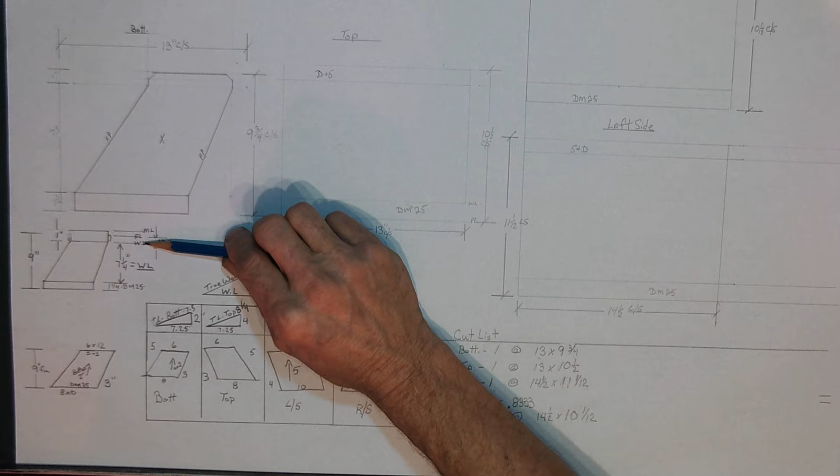Once we have done our triangulation to find the working length of each individual panel, our next step is to take the working length from each individual panel and add the allowances for our transverse connectors. As you can see from my sketch here, I need 1.25 inches for my Ductmate 25, and I need a total of 1 inch for my S and drive accommodation. That leaves me a total of 2.25 inches.

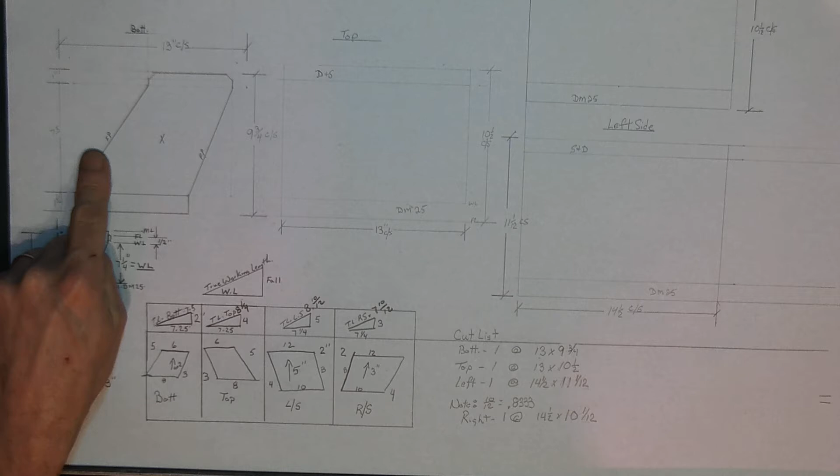So if I add 2.25 inches to my working length, or true working length of the bottom, I end up with 9.75 inches. Now if I come back to my original sketch here and add 8 and 3 is 11, plus my 1 inch female Pittsburgh, and my 1 inch female Pittsburgh gets me this 13. Now, the female Pittsburgh, I made that decision by putting the female Pittsburgh on the shortest side of my transition and the male Pittsburgh on the longest sides of my transition, which makes the left and right get the male Pittsburgh and the top and bottom get the female.

So, I end up with a dimension that is 8 and 3 is 11, plus 2 for the female Pittsburghs gives me 13. And our stretch out of 7.5 working length and 1.25 plus 1 gives me a cut size of 9.75 by 13. Now I've done that same thing for the top. I have a true working length of 8.25. Onto that I had to add 2.25 to get me to 10.5, and it is also 13 because I have 8 and 3 plus 1 plus 1.

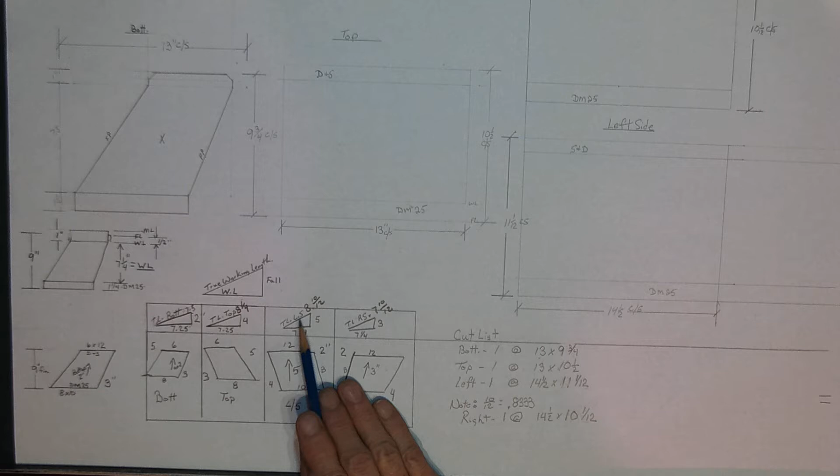Now when we look at the left and right side, we have to realize that now we are dealing with the male Pittsburgh, which is only 1/4 inch on each side, so I get 12 plus 2 plus 1/4 plus 1/4 gives me a number of 14.5. Now my true working length was 8 and 10 over 12. I converted 10 over 12 to a decimal of 0.8333, makes it easier for me to calculate, so I have 8.8333 plus my 2.25 inches for my transverse connectors gives me a left cut size of 11 and 1 over 12 by 14.5.

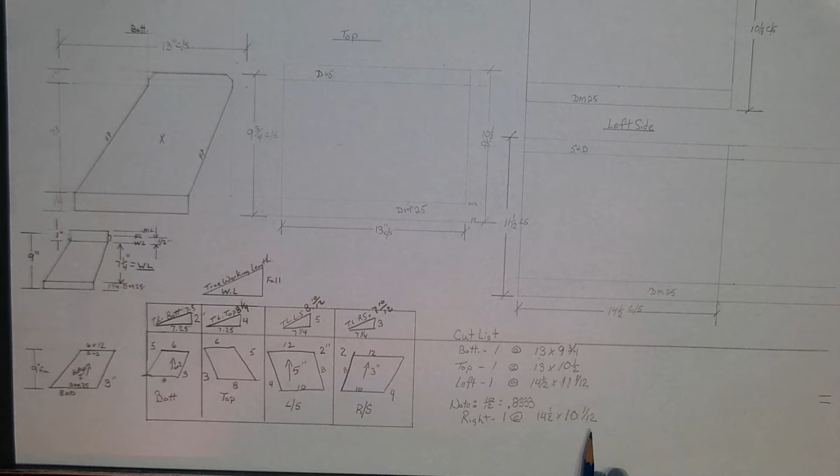Same procedure for the right side. I have a true working length of 7 and 10 over 12, which is 7.8333, plus my 2.25 gives me 10 and 1 over 12, and I have 10 and 4 plus 1/4 for the 14.5, the other dimension. So, what I have done now is quite simply, I have laid out my outside cut size of bottom, top, left, and right. This is no different than me going to the shear with this information and cutting these sizes.

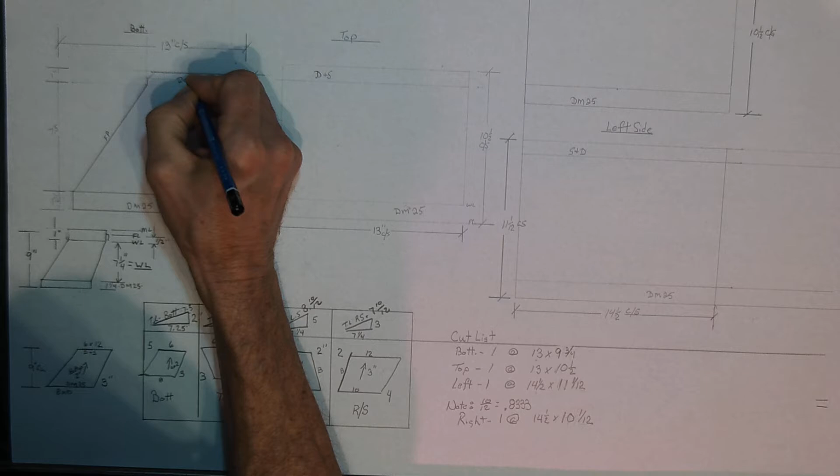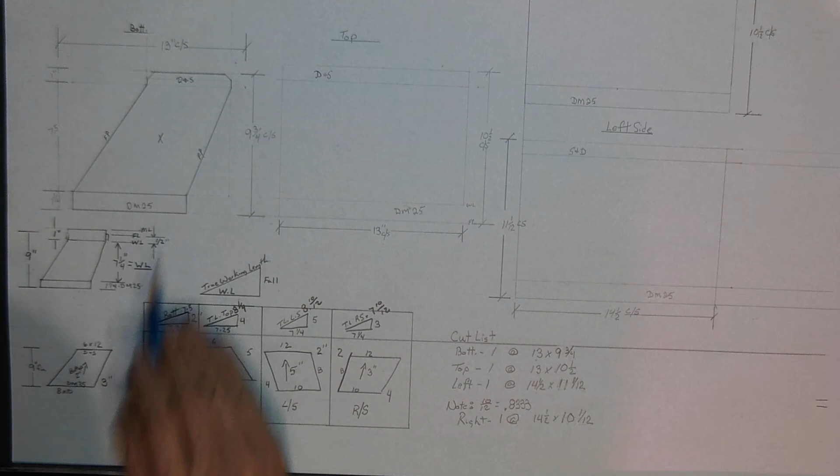So let's take a look at what I've done with the bottom. From my cut size of 13 by 9.75, I've subtracted 1.25 inches for my Ductmate 25. And I've subtracted 1 inch up here for my drive and S connection, which leaves me with my working length of 7.5 in between. Now, starting at one side from my cut size, I first take off the inch that is required for my female Pittsburgh that I allowed in. Then I'm going to put in my dimension, which is 8 inches. And I'm doing that along my working line.

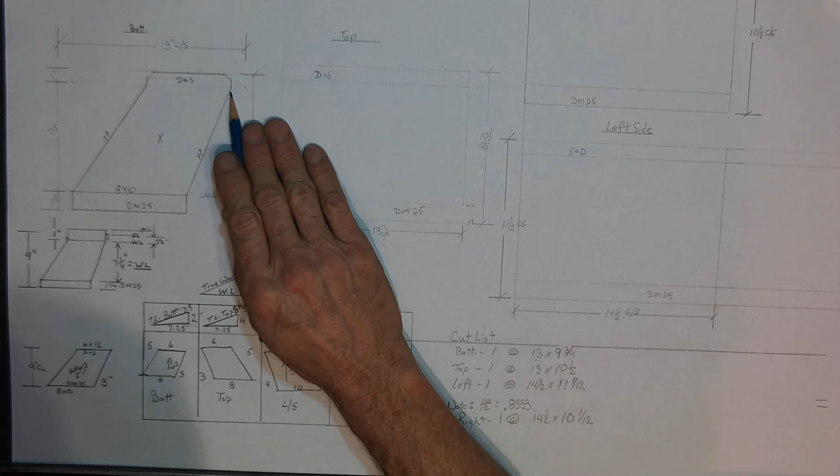I'm going to come up to my working line on the other side, and in from this corner now, I'm going to come in 1 inch from my duct size, and I'm down 1 inch because I scribed the inch to accommodate my drive and S. I come in 1 inch, I come in my duct size, which is 6 inches, and I connect the dots. I now have this panel. It's exactly where it needs to be.

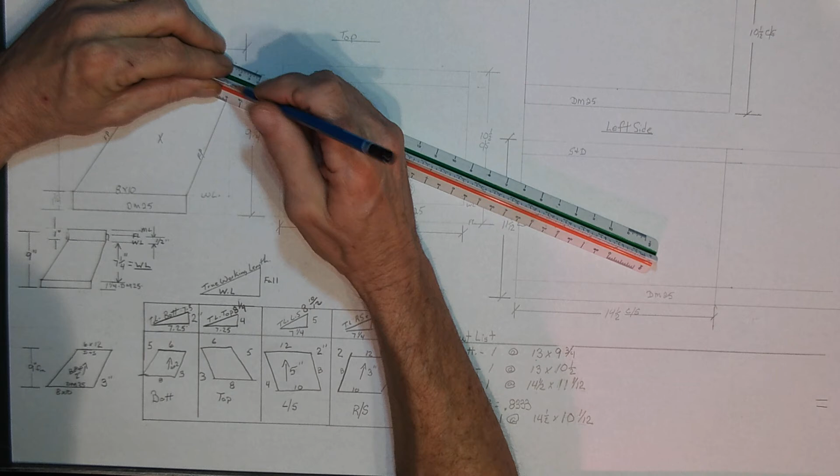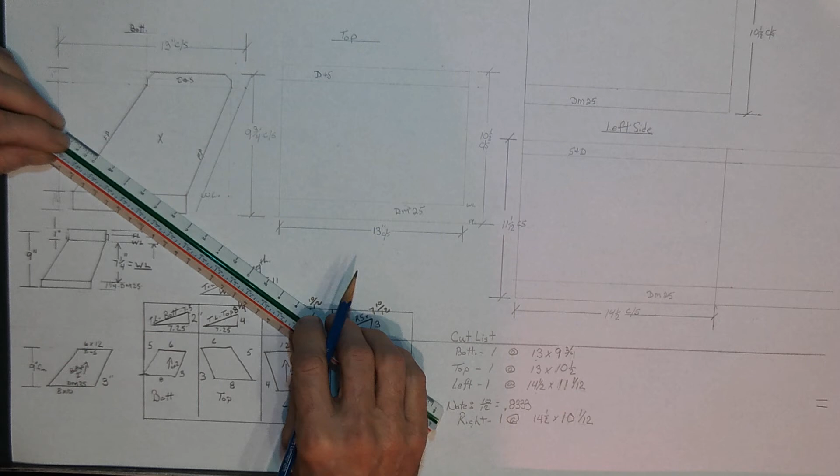My next step would be to add my 1 inch female Pittsburgh, which is 1 inch, and I measure perpendicular to this oblique line so that I actually get 1 inch. And there's my mark there, and let's just draw that through there. And there's my Pittsburgh allowance. We'll do notching once I've laid out another panel or two. So for now, I'm just going to lightly scribe in this 1 inch, and that's how we get the size.

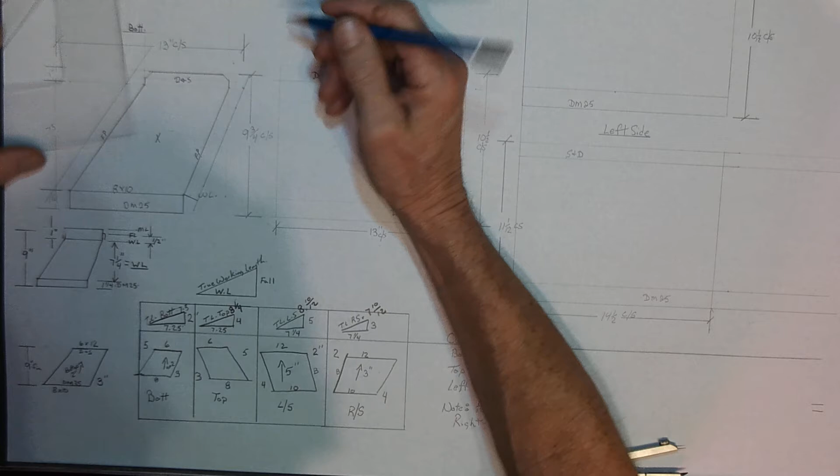In order to notch this, first thing that I want to do is recognize my obtuse angles, obtuse and obtuse, and from there I am going to notch simply 90 degrees to my finish line, which is 90 degrees to my finish line, right there. There's my notch. Here's my other obtuse angle, and I'm just going to eyeball that with a nice even space there, and there's my 90-degree notch there.

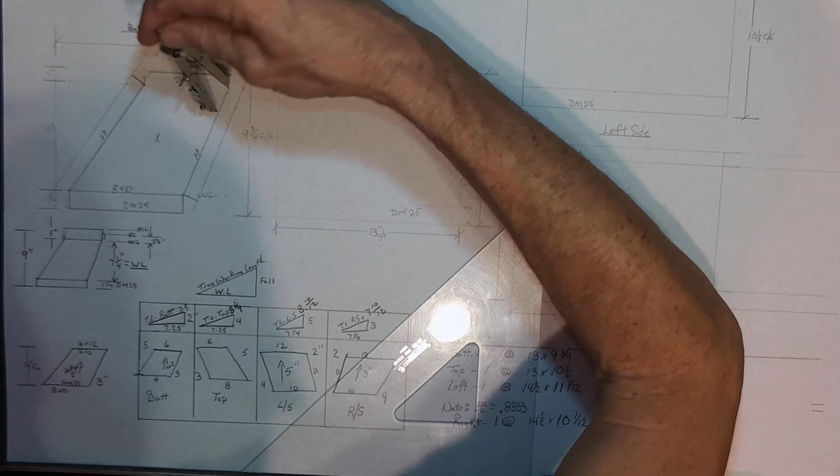Now, on the acute angles, we are required to duplicate the angle so the Pittsburghs don't get in the way of things when they're being assembled. And in order to do that, I need to duplicate this interior angle right here. Now, I'm just going to swing this over on this side, because where we are going to duplicate this angle, I'm going to duplicate this interior angle on the other side of this leg of the angle.

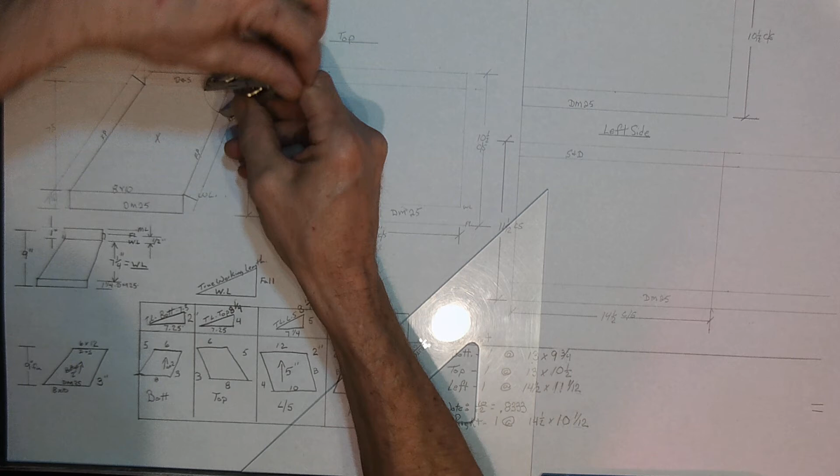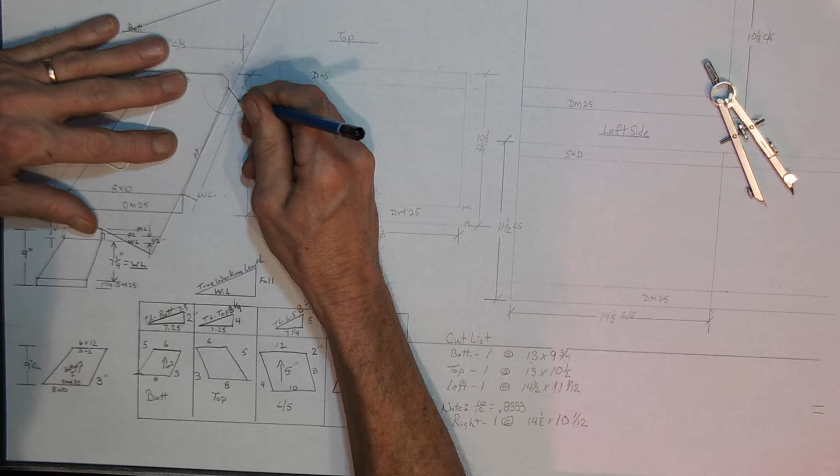So I've chosen a radius. Any radius works, and now I'm simply going to measure the chord length across that angle, and I'm going to bring it over to the other side of my arc. I've taken this leg and I've brought it over to here now. Now, I'm just going to line that up with my corner, and there now is my notch and my object line.

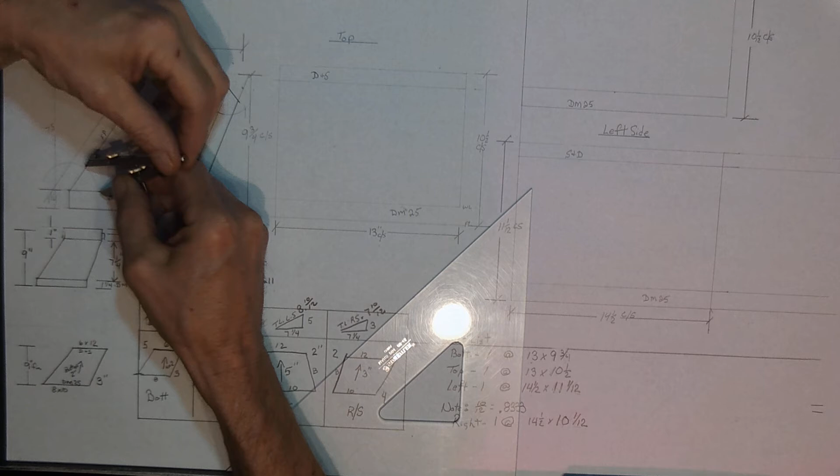Let's do the same on this other acute angle, and I'm going to create an arc, and I'm going to measure a chord. I'm going to duplicate that chord on the other side of the line and bring it back to my vertex, which will give me the notch that I am requiring right there. And now I have a finished bottom panel.

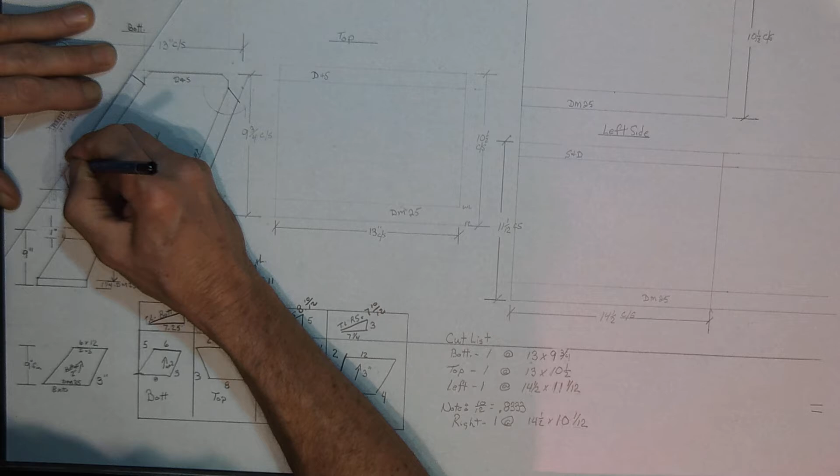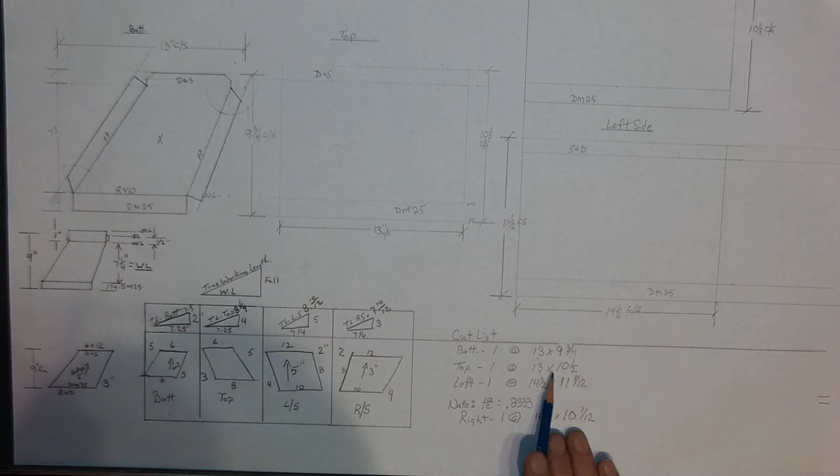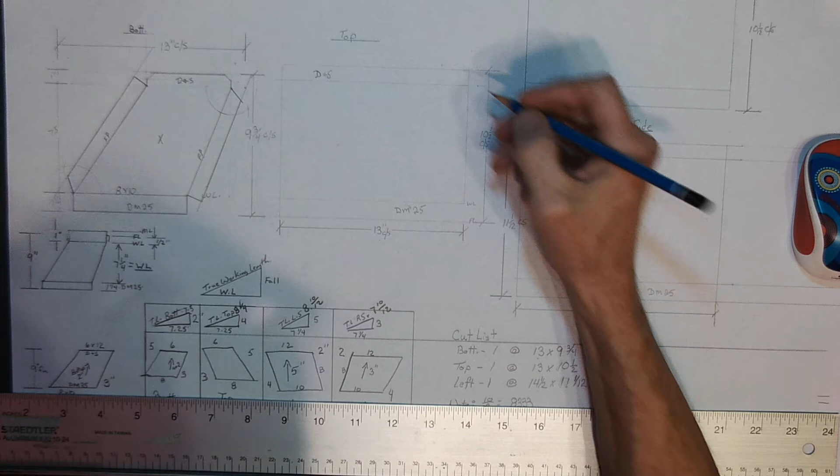To lay out the top panel, I'm going to do the exact same thing. I have laid out my cut size, 13 by 10 and 1/2. And here's my cut size here, 13 by 10 and a half. Once again, I am going to be required to work on my working line once again. From this cut size, I've subtracted the 1 inch for my duct drive and S connection, and I have subtracted 1.25 inches at the bottom for my DuctMate 25 connection, and I know that I have a mirror image of this bottom panel. So, making a mirror image, let's get to my 3/8 scale.

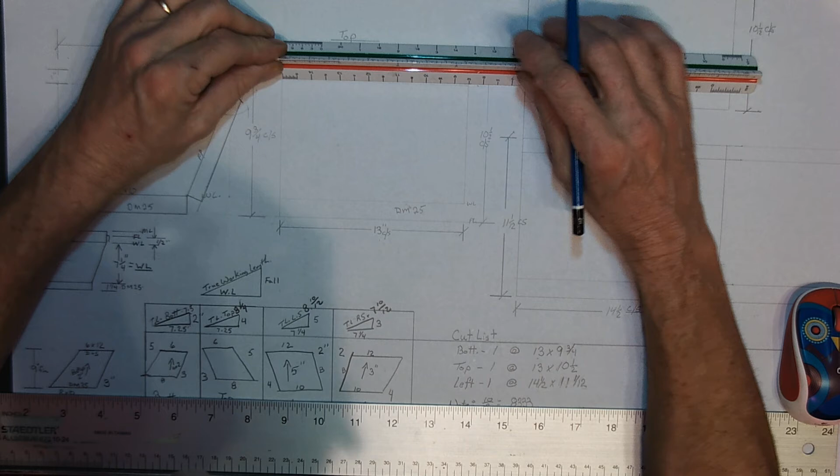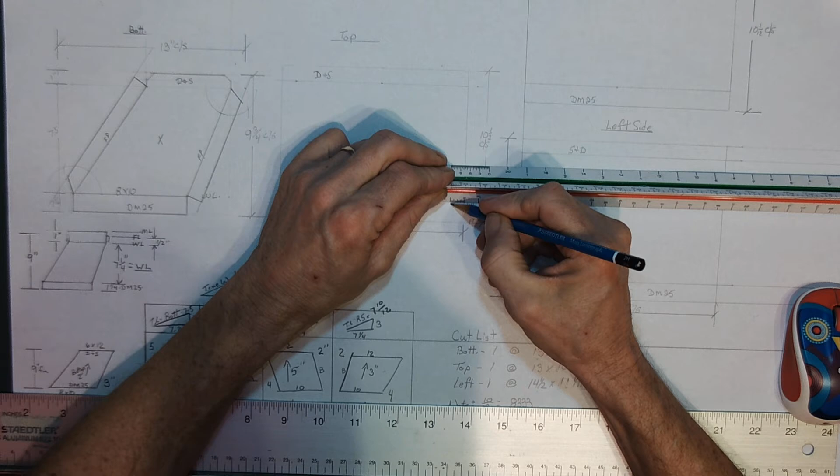I'm going to come in 1 inch to accommodate my female Pittsburgh, and my duct dimension is 6. I go to the bottom. I'm going to start at this corner now, and I'm going to go 1 inch to accommodate my female Pittsburgh, and my duct dimension is 8. I can now connect the dots on these finish lines that I've just laid out, and there's my raw pattern.

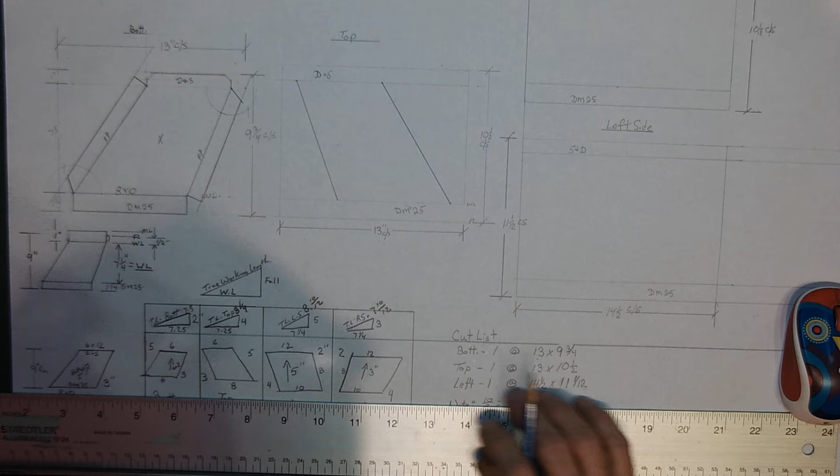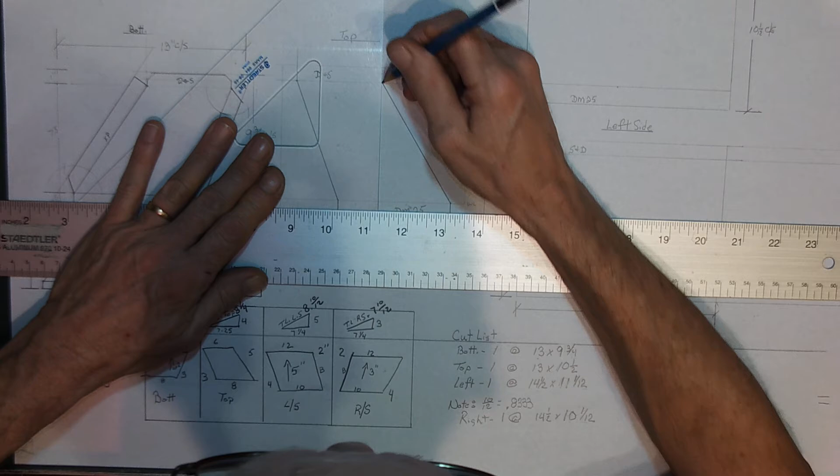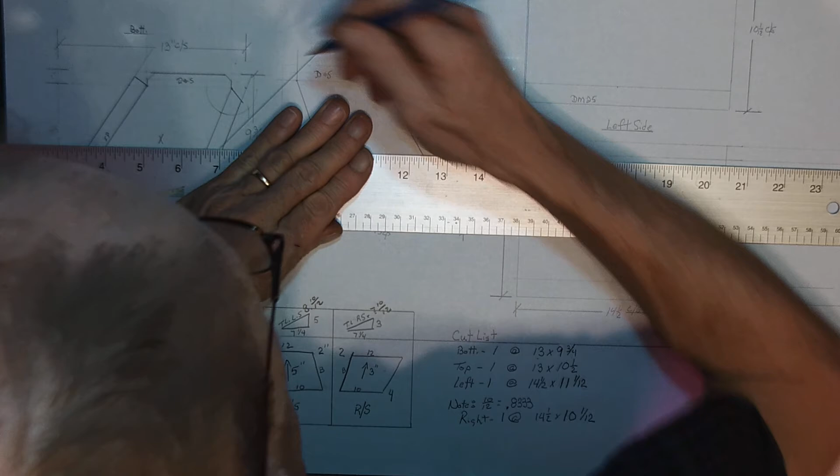It's so easy to lay stuff out from a finished cut size that this is the way we want you to do it. I would like you to do it this way. It takes away from mistakes. And there's my DuctMate connection, all finished up nice. I need to extend my S and drive connection slightly here. I need to measure my 1/2 inch so I get my finish line right here. And we will just connect that across. And I can get the proper notching detail on here now with my 45-degree triangle.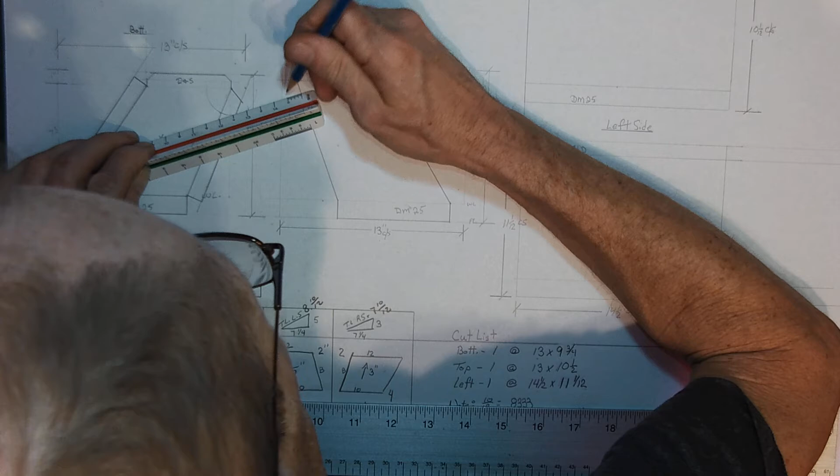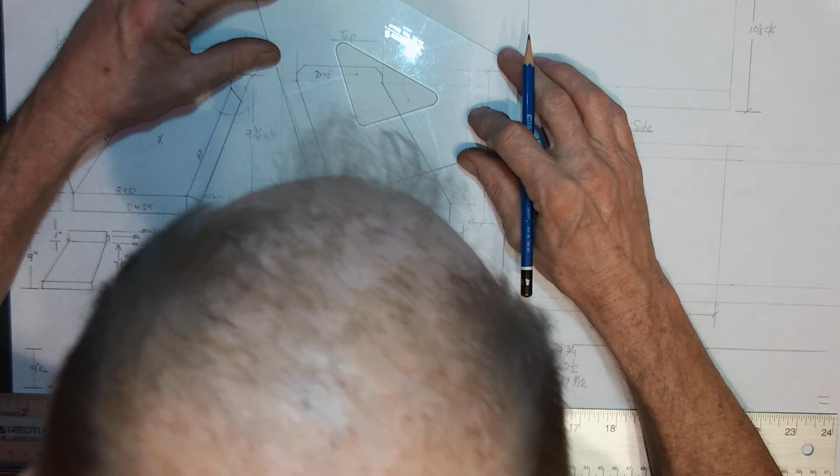One inch on each side. Female Pittsburgh, female Pittsburgh, 1 inch for a female Pittsburgh, and finally, once again, 1 inch for my female. And once again, I'm just going to lightly scribe that in so I can determine where my notches land. Recognize my obtuse angles and notch 90 degrees to that obtuse angle, which is here and here.

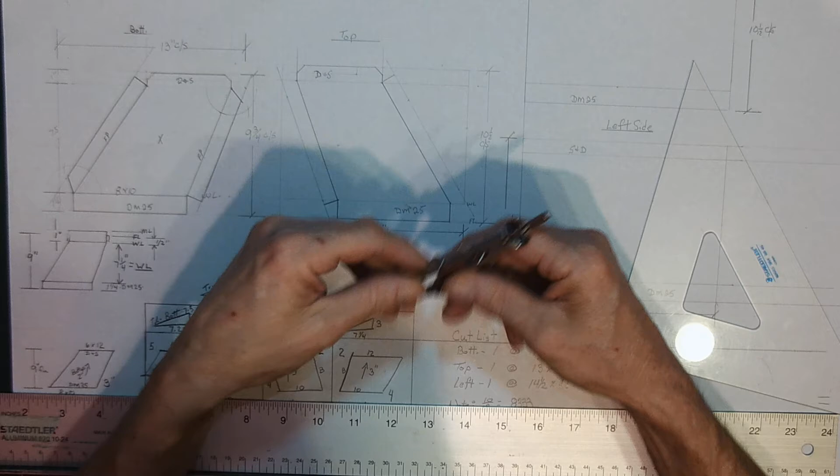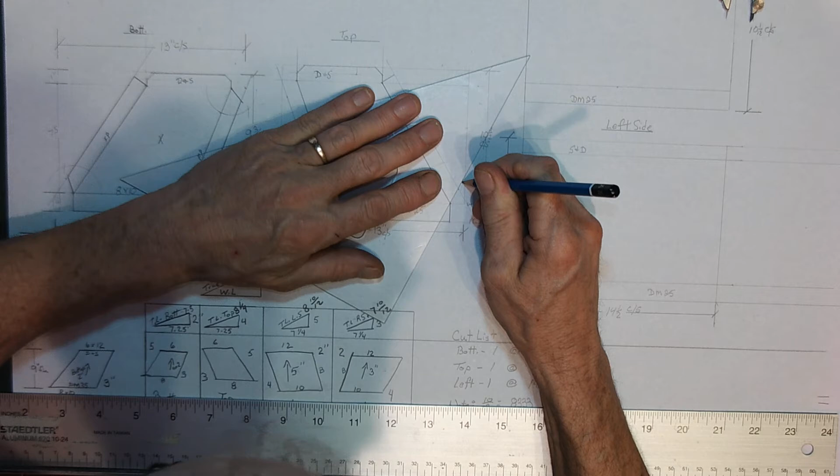And once again, we need to duplicate the angles on our acutes. So I'm just going to swing that right there. Measured my chord. Very close already. Bring that there. And once again, I've duplicated the angle on the other side, finishing off this seam and obtaining the proper notch.

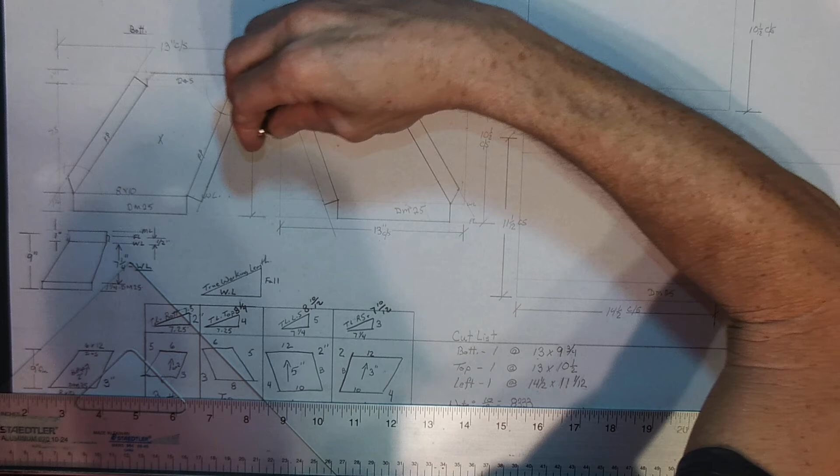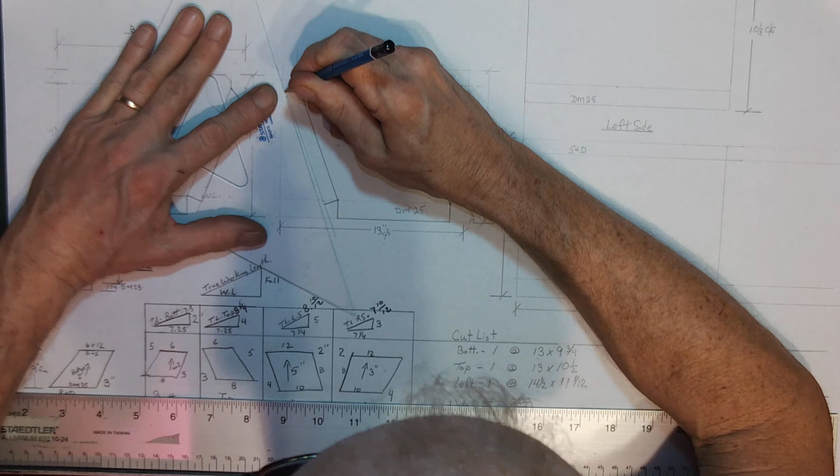I have to duplicate the angle on the acute side of this, which is this corner here, and I'm going to swing the arc once again. I'm going to measure the chord, bring it to the other side, and connect the dots. Duplicated the angle, giving me the proper notch. And there's my top panel with the inside.

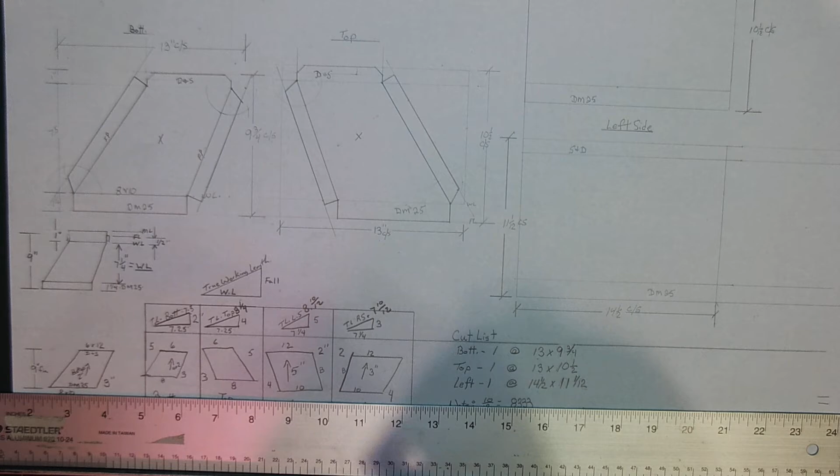My left panel. Now I'm down to my sketch here, and I can see that my left panel is going to start at the top left side with a 12-inch dimension. First thing I need to recognize is that this is going to require a 1/4 inch male Pittsburgh to begin with. Right there. And then my 12-inch duct dimension, which is here. Then I'm going to come down to the bottom end, and I'm going to come in my 1/4 inch.

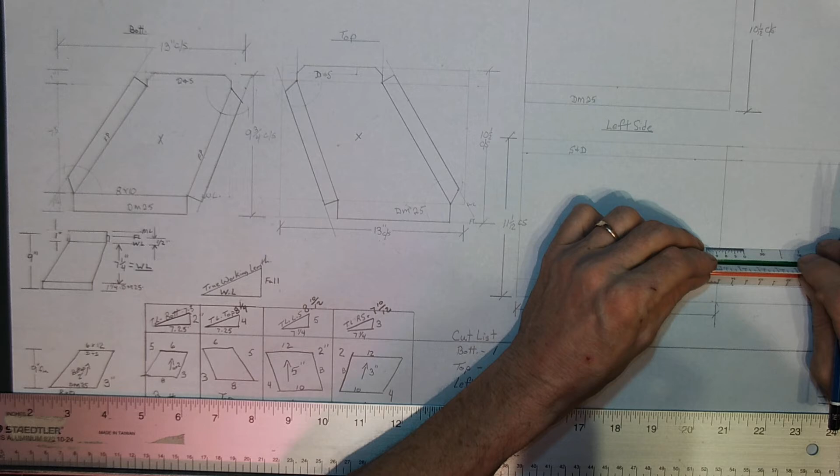We're going to do that on the working line. 1/4 inch. And then my 10-inch duct dimension. Careful, it's a 3/8 scale. Get the right 10. And I'm going to connect the dots.

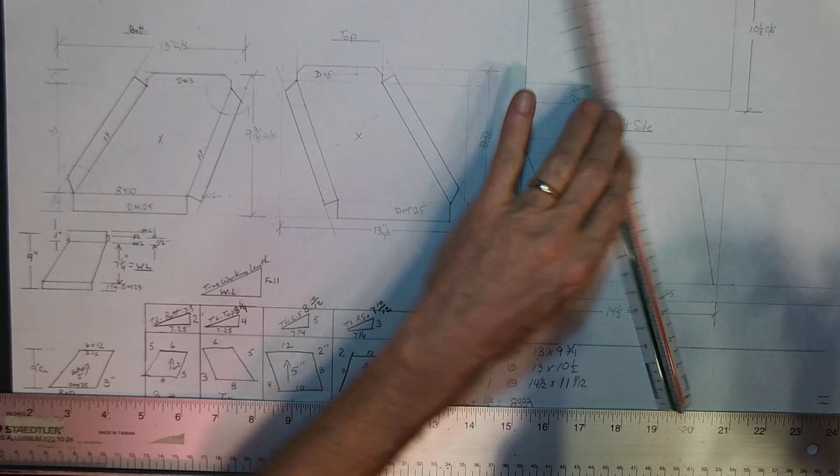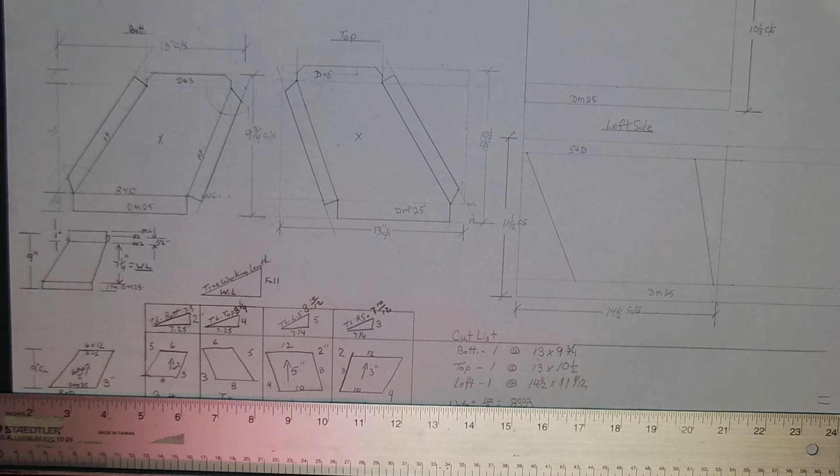Now, double check. Take a look at my drawing. I have a 4-inch offset here. That means I should have 4 plus a 1/4 inch allowance. 1/4, 4 1/4. Come back to my drawing here. I have 2. I should have 2 1/4 here. And I have 2 1/4. There now is my left side panel.

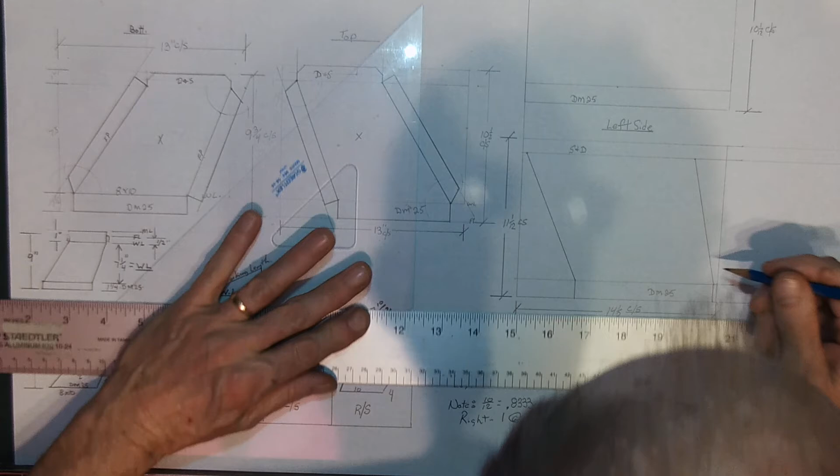I can finish that up like this. I always want to leave the male Pittsburgh on when it comes to Ductmate. And the S and drive part, we can just sketch that up for now. And let's put some measurements on here on the 3/8 scale.

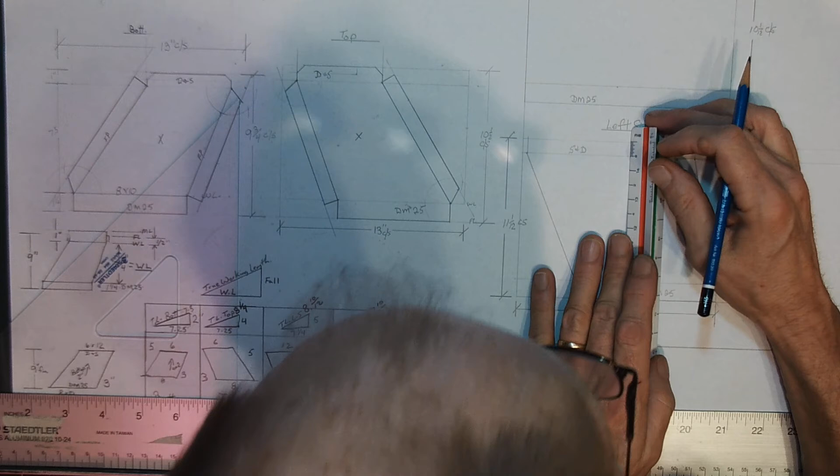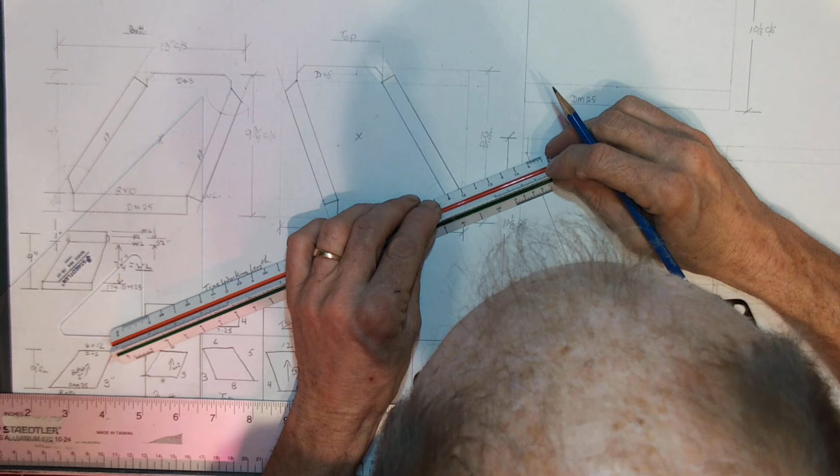I can mark the center of here for my notching purposes. I need a 1/4 inch male Pittsburgh, and a 1/4 inch male Pittsburgh here. And now we're going to lightly draw that in, making sure I'm nice and parallel here. And on the other side, I have my male Pittsburghs.

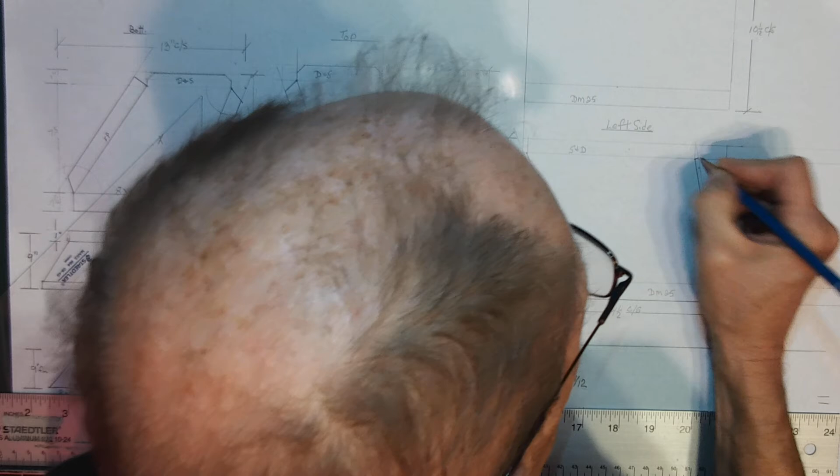Notching: obtuse, 90 degrees. Acute, duplicate the angle. 90 degrees on my obtuse. Acute, duplicate the angle. Oops, that's obtuse. I can draw that in. I can draw this in.

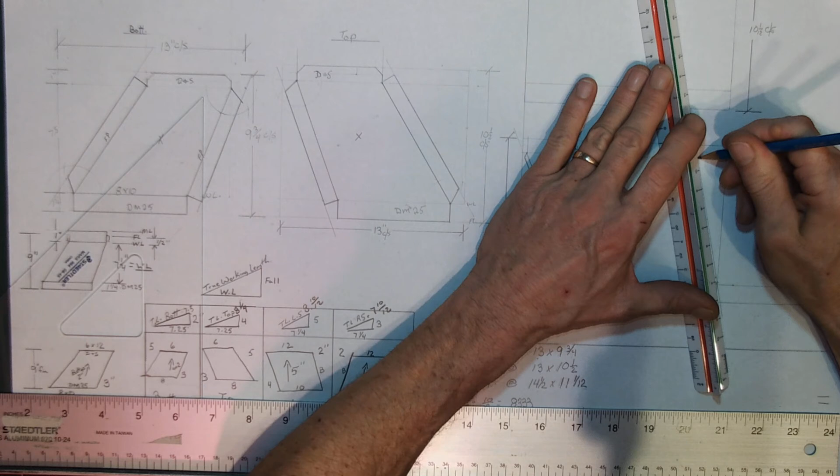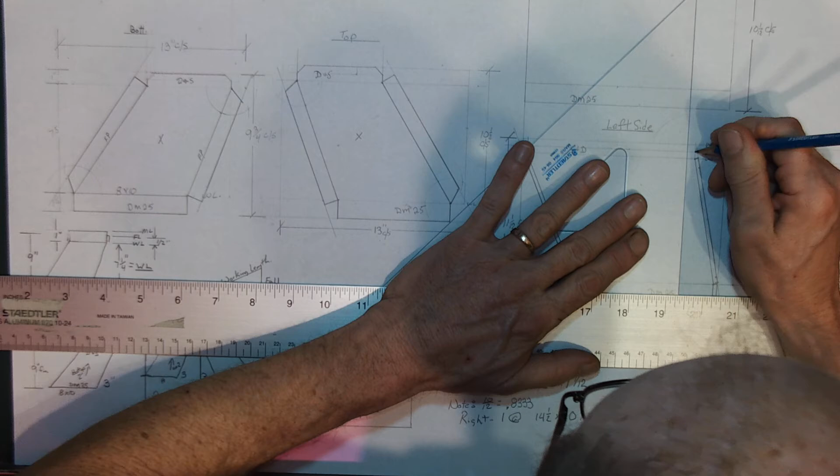Finish my S&D connection. S&D comes straight from this working line. Finish line, material line. Which means I'm going to come straight to here. I'm going to come straight to here. 45 to accommodate my field installer. And connect the dot across the top of that. And there we have our left side panel done.

I need to add this 1/4 inch down here because Ductmate likes it like that. And it's just basically a straight notch there.

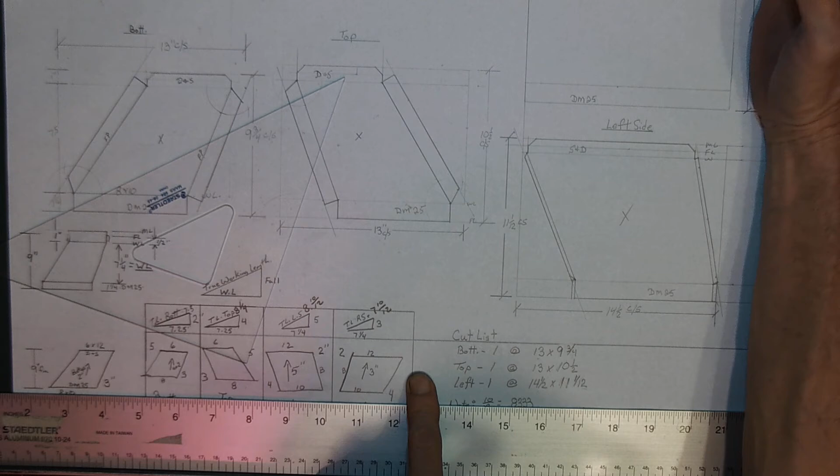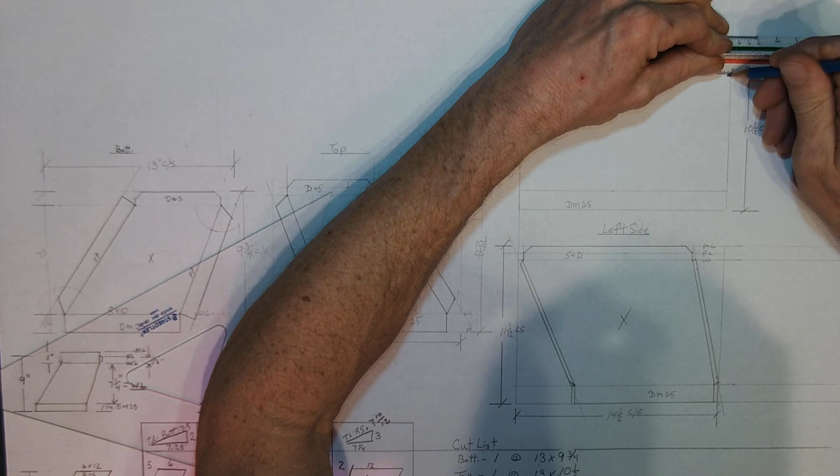Well, right side is a mirror image of the left side, just like I'm seeing here. So I'm going to start on the right side now. And I'm going to lay out my 1/4 inch. Let's make that so we can see it. On the 3/8 scale, on my working line, I'll lay out my 1/4 inch. My duct dimension of 12. And my corner.

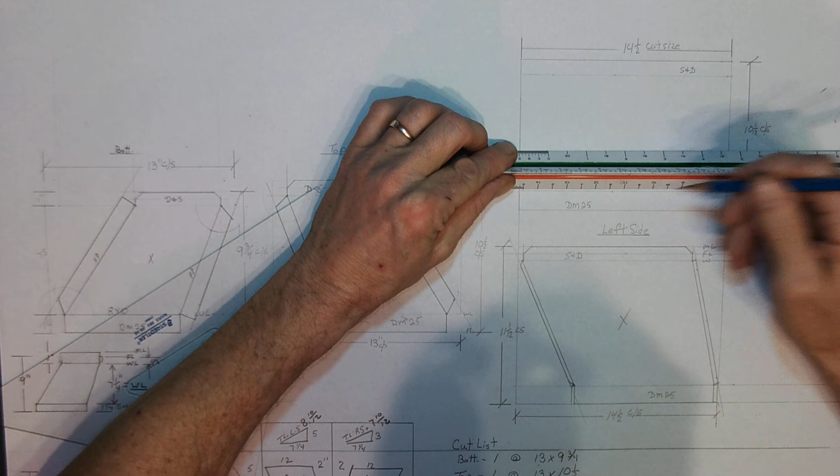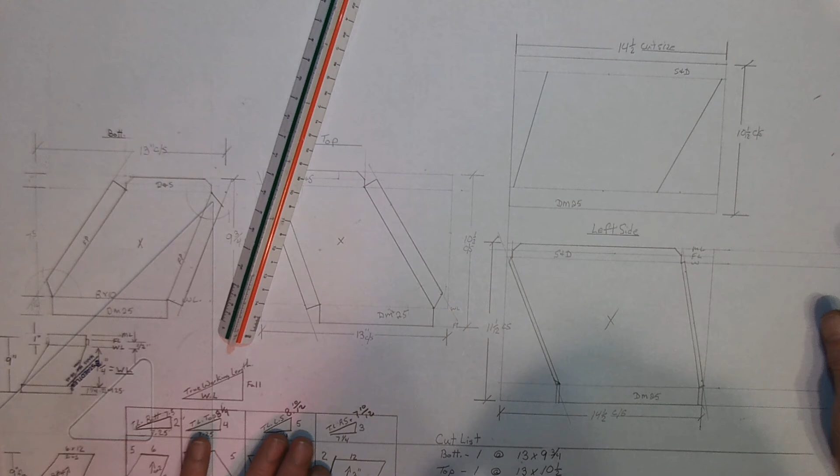And now I'm going to come down to the bottom side here, and I have a 1/4 inch to allow for it first of all, which is right there, and my duct dimension of 10. Once again, 3/8 scale, correct? 10 is required. I want to connect my dots. Once again, the ease and the simplicity of laying out from a cut size. Very advantageous. It makes our life so much easier.

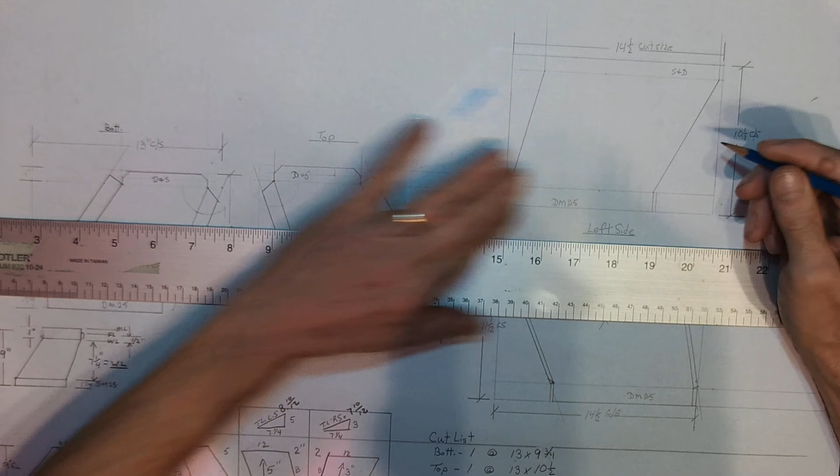S&D connection, I'm going to carry that on. Carry that on. Bring that down here. I've got my 1/4 inch there. Got my 1/4 inch there. A 1/4 inch there. A 1/4 inch there. And we'll make our S&D connection.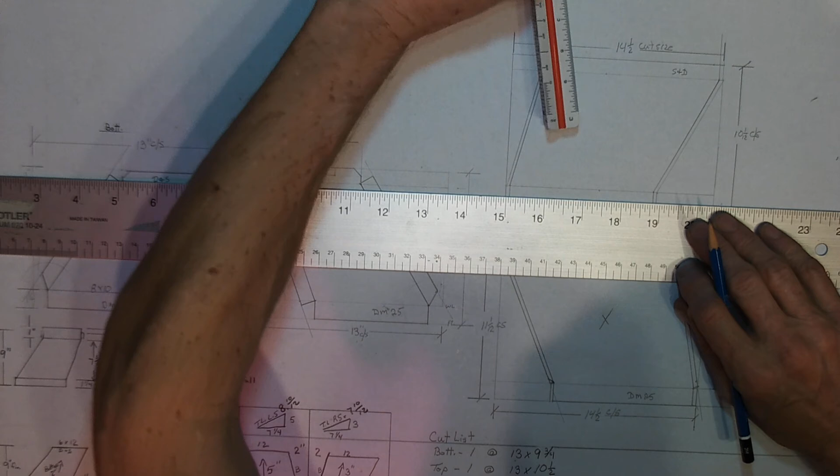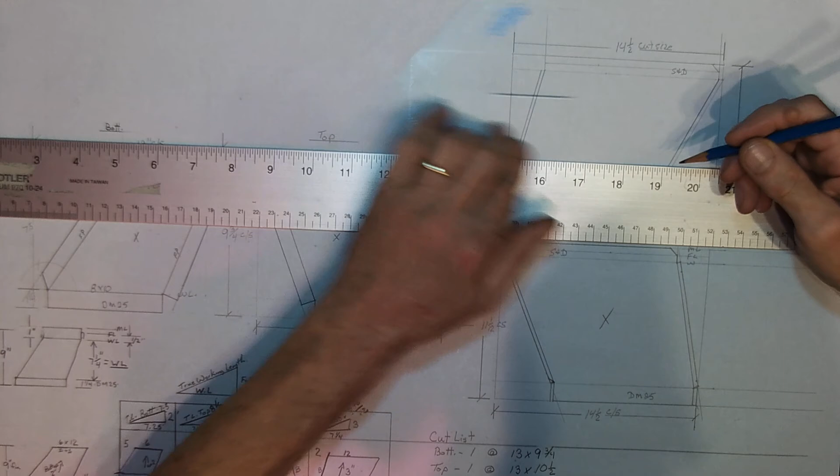Notch that at 45 degrees. Notch that. Oop, stuck on the tape at 45 degrees. And this should be 45 degrees, guys. Some of you have been doing 30 and I really don't care one way or another, but others might.

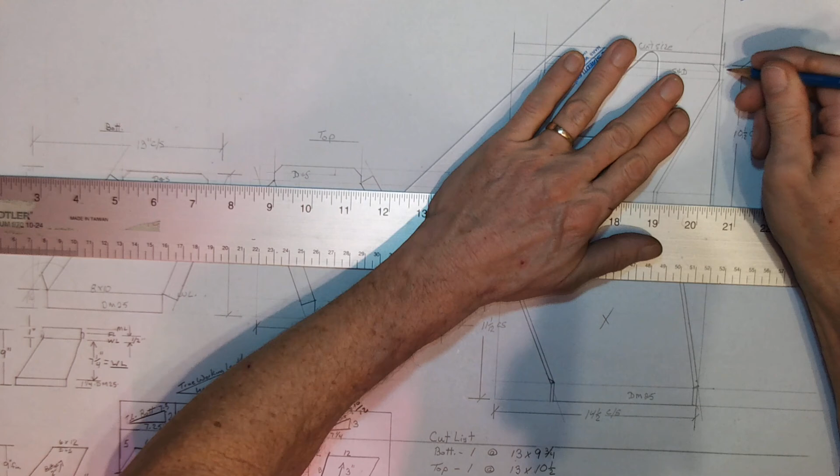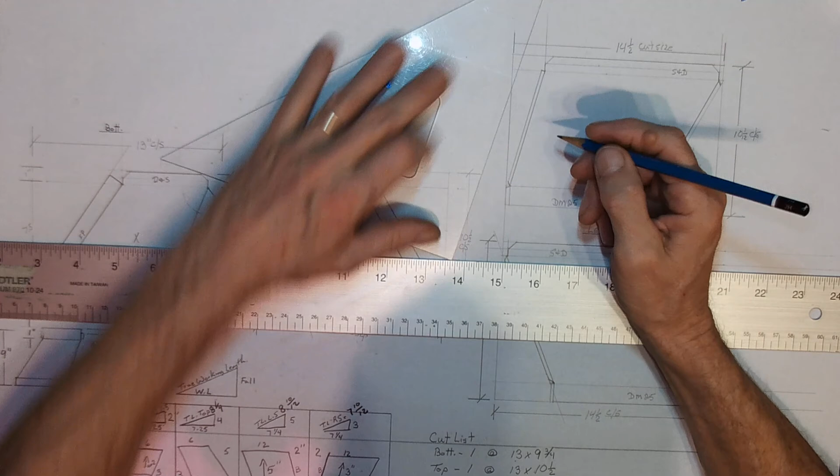Once again, acute, duplicate the angle. Obtuse, 90 degrees. Acute, duplicate the angle to 90 degrees. There's my notch there, there's my notch there. This would be a V notch here, and we are complete. I now have the inside of all 4 of my sides. We're all ready to go.

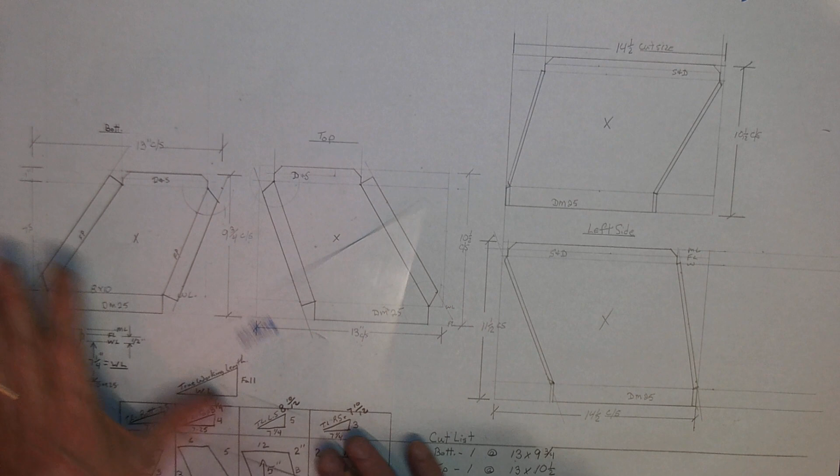That will be it for this video. Your next video will be on shop instructions for this same fitting.